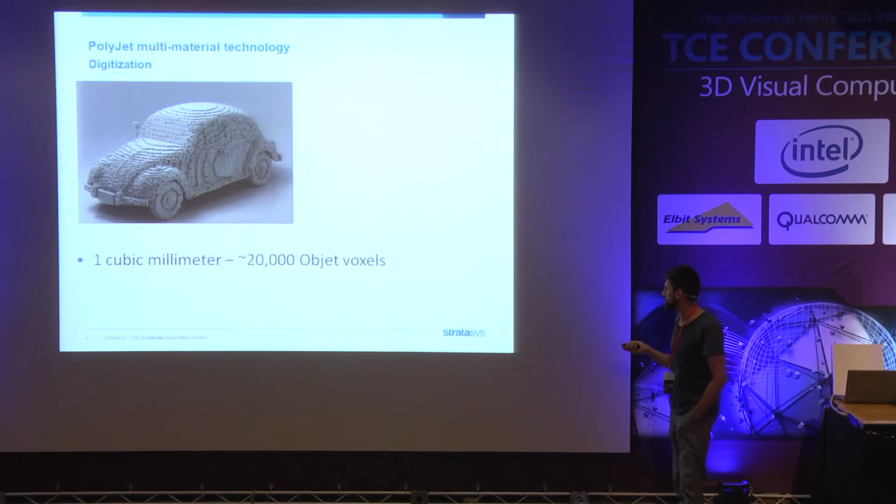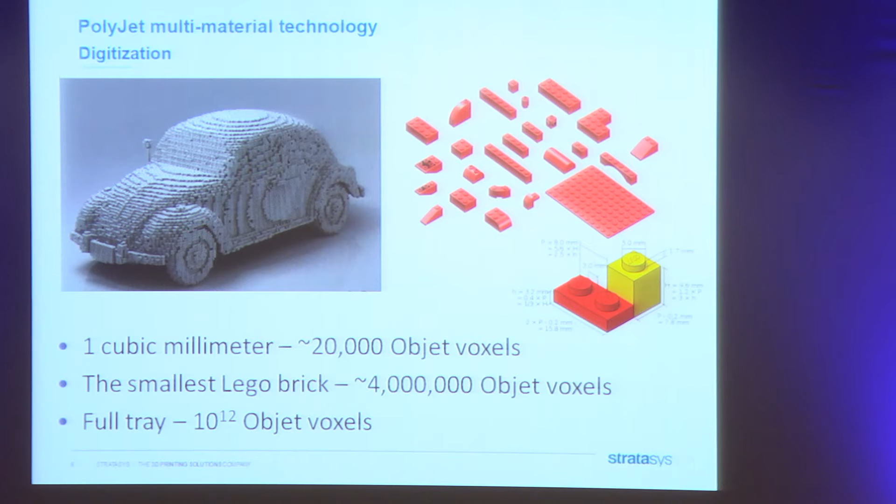And trying to explain the complexity of the digital world we are living in, I must say that 1 cubic millimeter of a printed part will contain about 20,000 Objet voxels, Objet being the old name of our technology. And the smallest Lego brick will be composed of 4 million voxels, while a full tray will have an enormous number of voxels. So we need to manipulate all this data in order to allow our customers to make use of this capability.

And at the end of the day, we say that if 3D printing brought us the freedom of form, then multi-material 3D printing brought us freedom of composition. So we can not only generate any form that we want, but we can also control the composition in any tiny volume of this object.

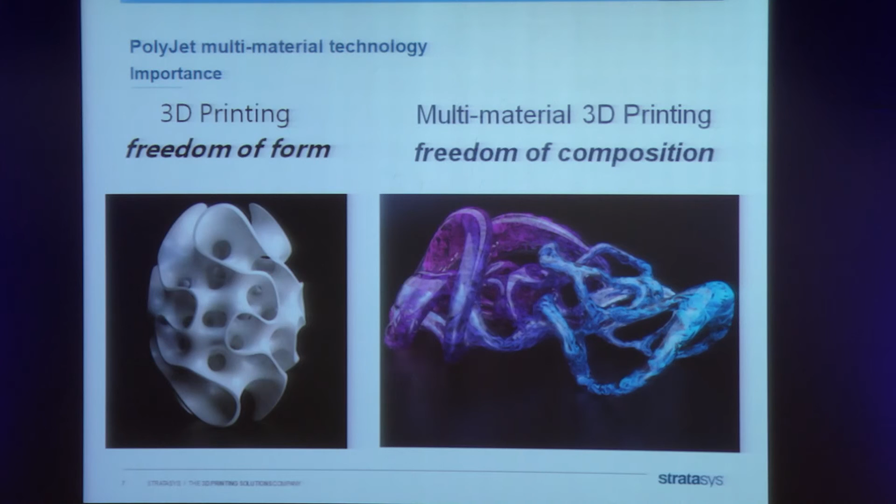And it is now being used for many different products and prototypes. As you know, 3D printing is mainly used today for prototypes. So every object that you hold, be it this pointer or this laptop or your iPhone or the car that you are driving or the plane that you are flying, all of them went through a prototyping phase, and about 90% of the prototypes were made using 3D printers.

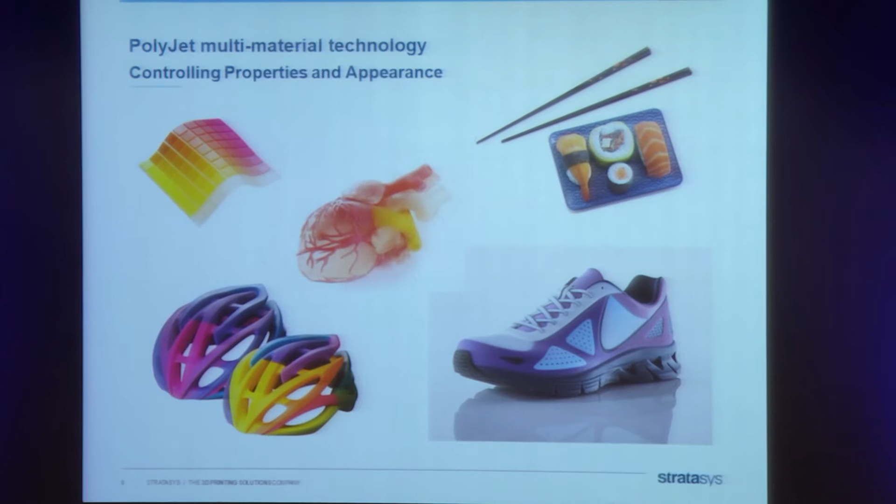And last month, we released our new 3D printer called J750, which is the first full-color printer that's capable of printing full-color parts. You see this one, it's also printed, and also integrating flexible materials into it, transparent materials into it. So you really have huge material possibilities when using this device.

And the way that we combine these different materials together is by creating some microstructures. They can have some ordered phase or some random phases that mix the different materials in various ratios to create the different properties. So if we have a yellow material and the magenta material, we can create obviously the orange and red materials by mixing them in different portions.

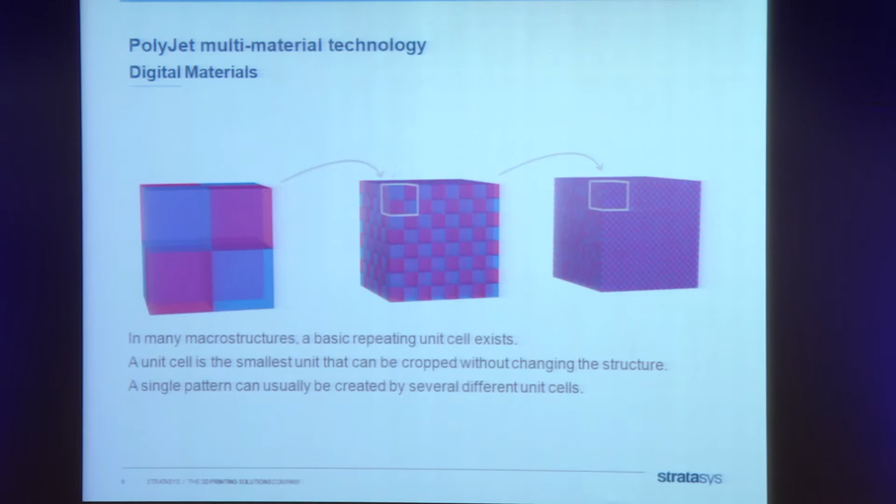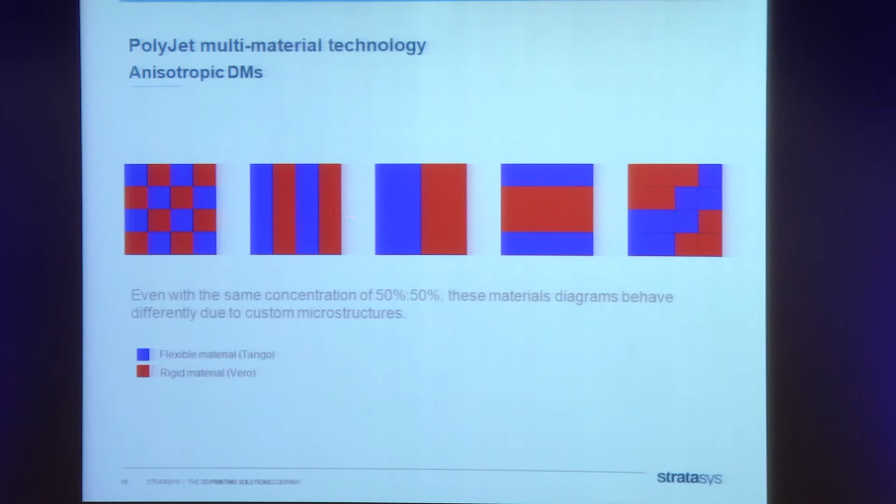But we can also create anisotropic properties, parts that behave differently in different directions, by mixing, for example, a soft material and a stiff material in different shapes. So all these cases have the same amount of soft material and hard material, but the way that they are aligned is different, and it will strongly affect the way that they perform.

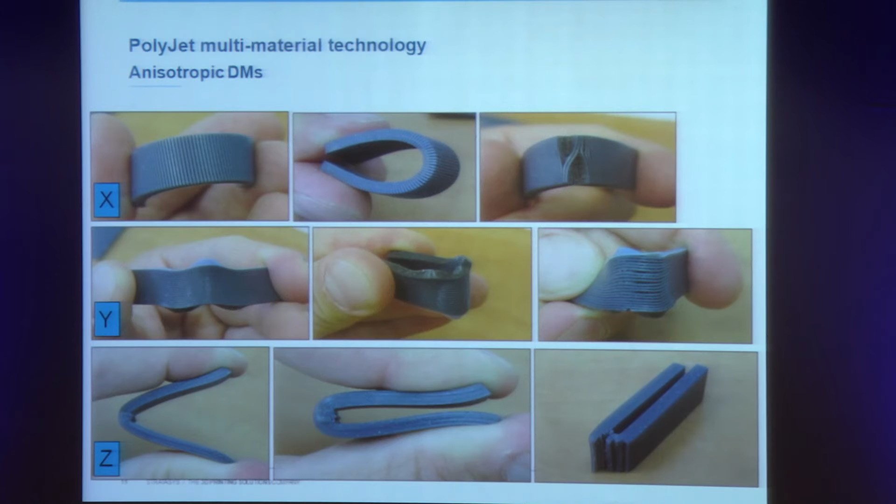So these three samples have some sandwich structure, all have 50% of soft and 50% of stiff, but they're only oriented in different directions, and you see that the mode of failure of these parts is totally different. And here also you see that they break in completely different ways.

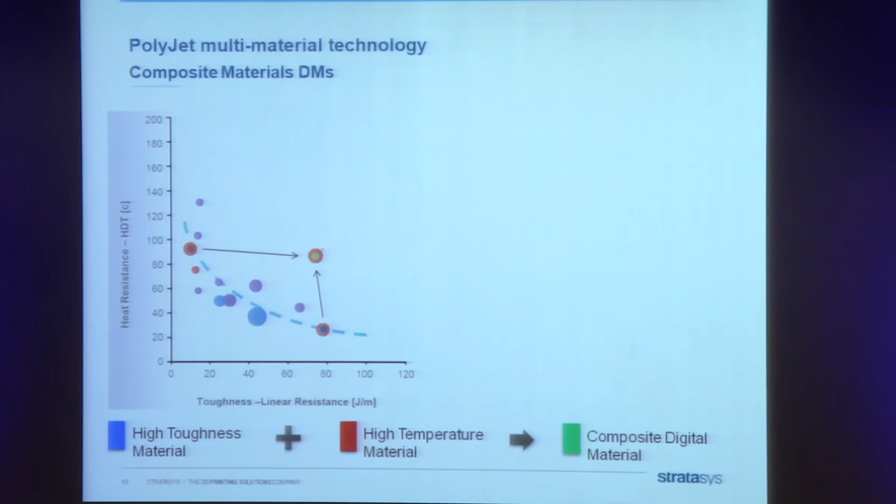And we take it to the limit when we design composite materials that actually mimic the function of conventional composite materials. We take in two components. One is very tough, and the other is very stiff and with very high temperature resistance. Each one of them cannot be used because this one is not stiff enough and this one is not tough enough.

But when they are combined, they have some synergistic effect and result in much better properties than you would expect from a general mixing. And it's achieved by a very sophisticated alignment of the different materials over the printed geometry.

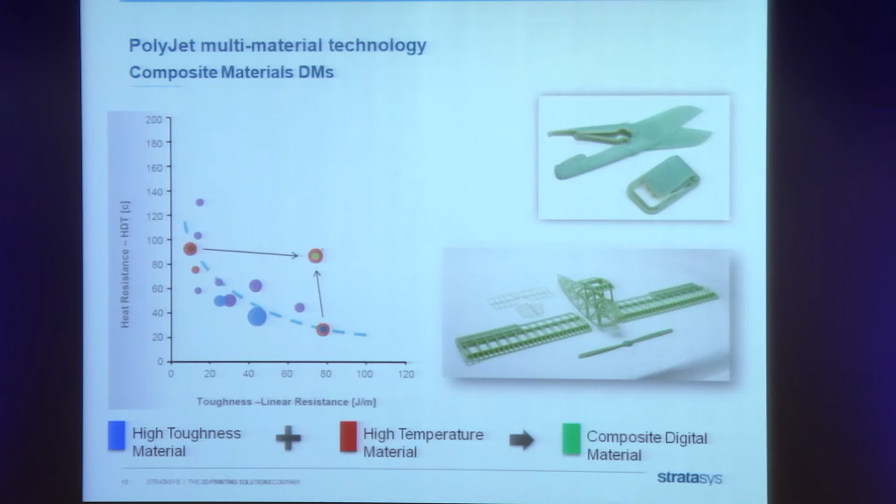So we take all this research and we look at what are the other uses except the prototypes that we can make with this unique hardware that can actually position droplets, tiny droplets of different materials, in any volume that you want.

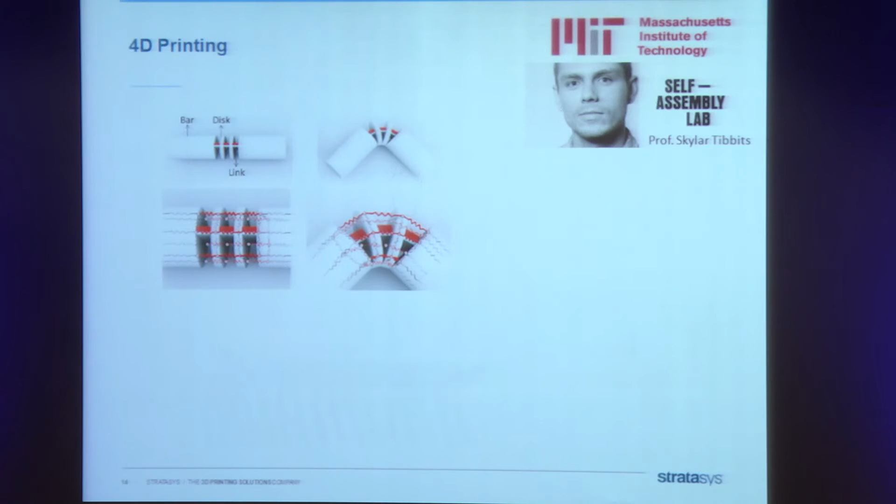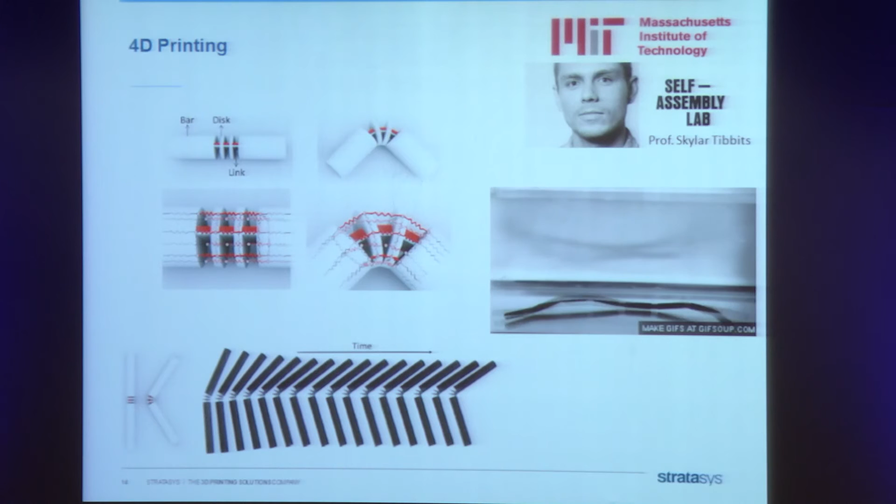So in the 4D printing project, we collaborated with Skylar Tibbits from MIT, and we created a material that swells in water, and it's the red material here, and another material that is just a stiff material that does not swell in water. So when we print the shape and we put it in water, then actually the red material expands and creates some kind of bending. And we can create structures that can be programmed digitally to go from one shape to another shape. And that's a very simple demonstration of just a linear strand going to some cube.

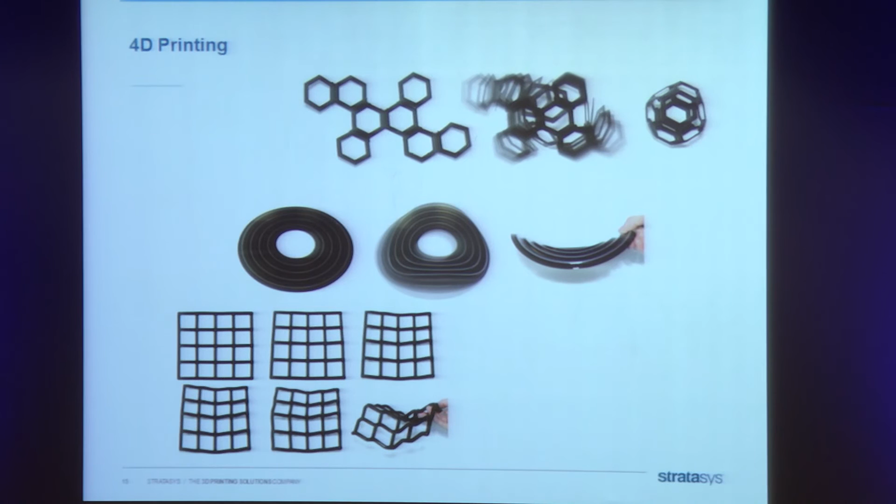And then we made other demonstrations of more sophisticated three-dimensional structures going from one form to another form just by programming how you position the material that swells and the other material that remains static. And all these use a lot of programming and a lot of simulation software to allow the designer to generate these geometries and to program what the transformation will look like.

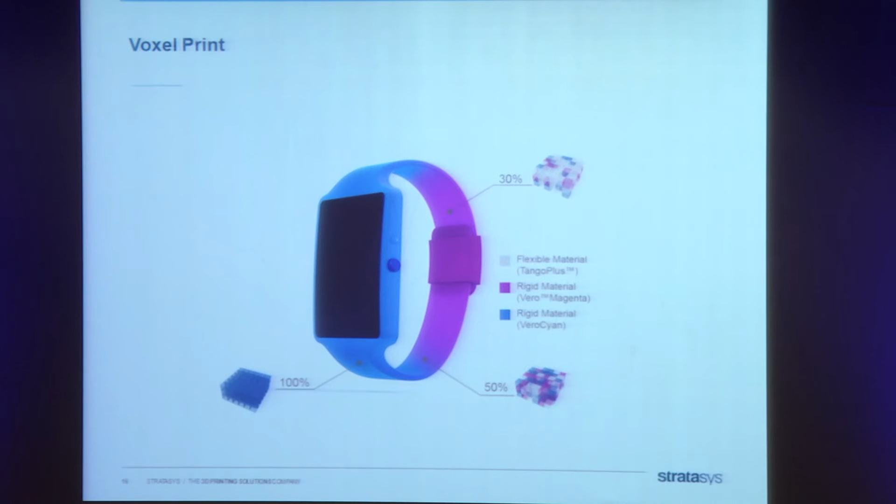And when we go even further and we don't want to just limit ourselves to distinct areas assigned with specific materials and working only with ordered materials, we want also to enable complete free form of gradients of any materials that we want. We developed a module that we called voxel print, where we enable the user, instead of just assigning a specific material to a volume represented by a mesh, to send directly bitmaps that correspond to each droplet that is being printed.

So we can actually program our printer to maximize the capabilities and control every little piece of the geometry that it prints. So you can make gradients in any transition that you like. And that's a kind of experimental interface that we currently provide only to research institutes.

And it requires the users to use some programming language, some MATLAB or C++, or generate their own modules that will output these bitmaps, because today we don't have enough tools that allow volumetric painting and creating some volumetric raster structures. But in recent years, we see more and more works that are developing such tools.

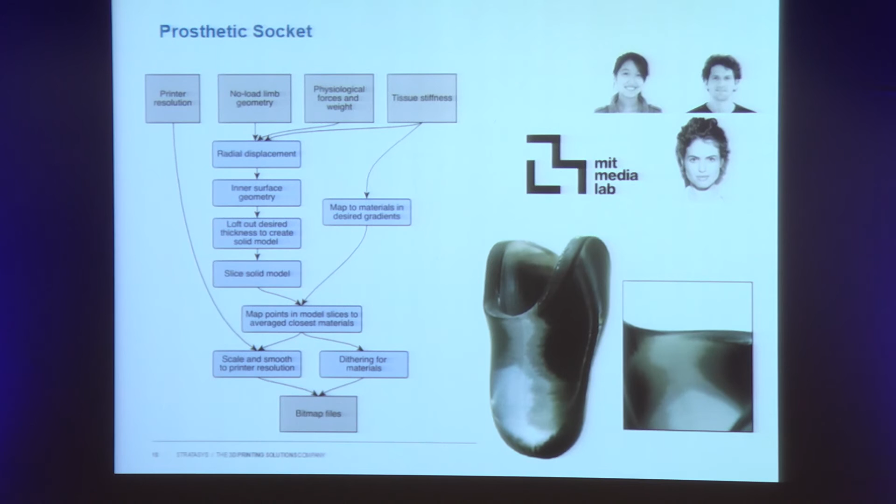And it was printed with our TangoPlus material, which is a rubber-like material, and a stiff material, and actually created a very interesting heterogeneous structure. And you can look, there is an article on this subject.

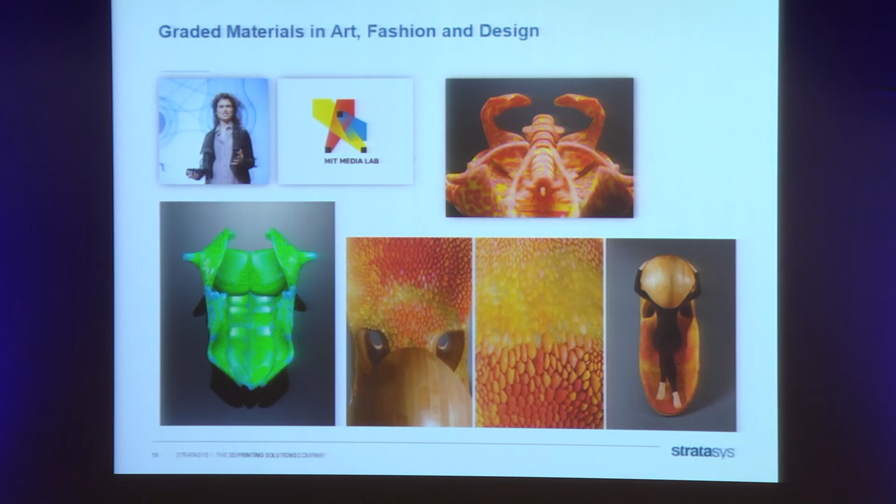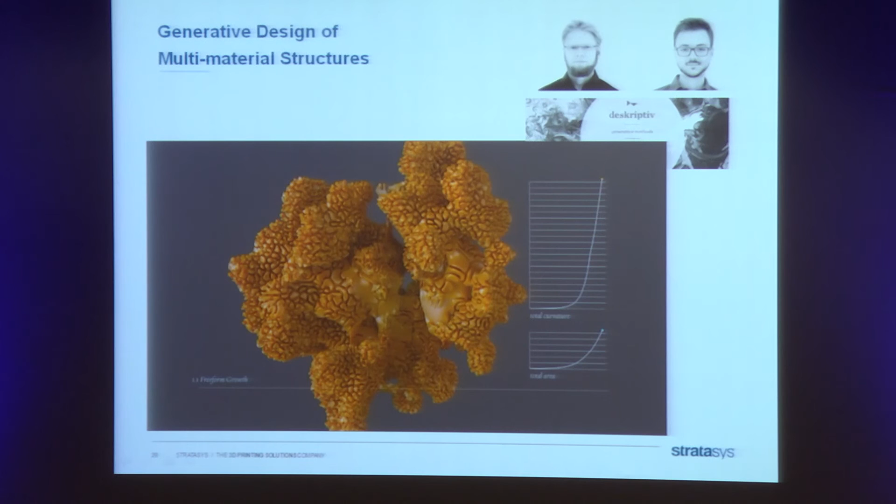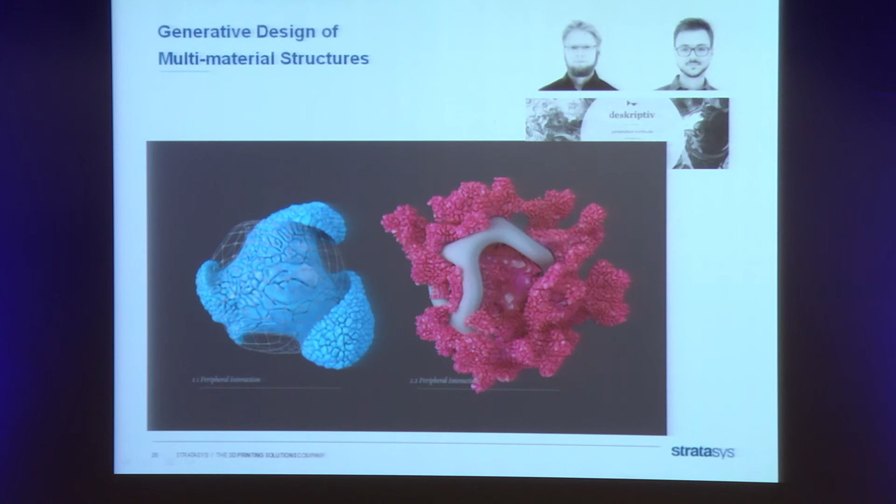But recently, she started working with two guys, Christopher and Dominic, from Deskriptiv, who created algorithms that actually grow structures. They grow structures and they grow multi-material structures. So you guys obviously are familiar with these technologies, how this stuff is made. I'm more on the chemistry side, so I just make use of these tools to combine our different materials and see how we can take it to the limit and create something that was not possible before, and also to see if we can make this multi-material printing more accessible to the regular users.

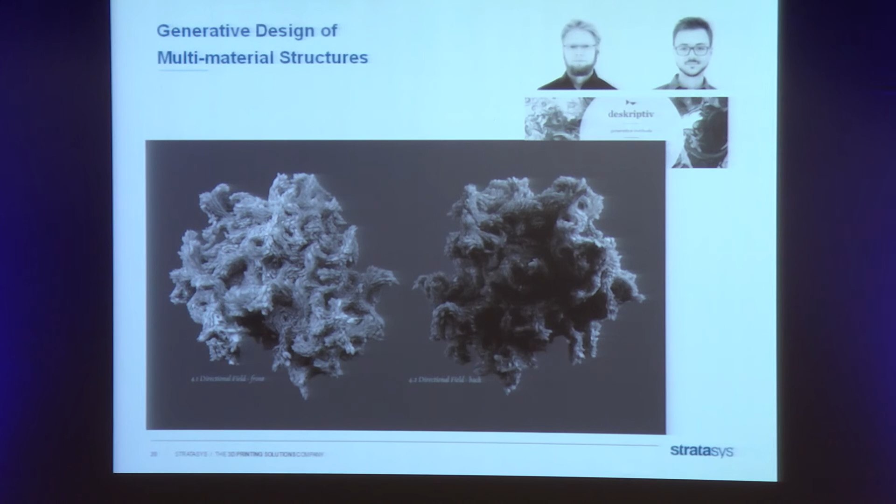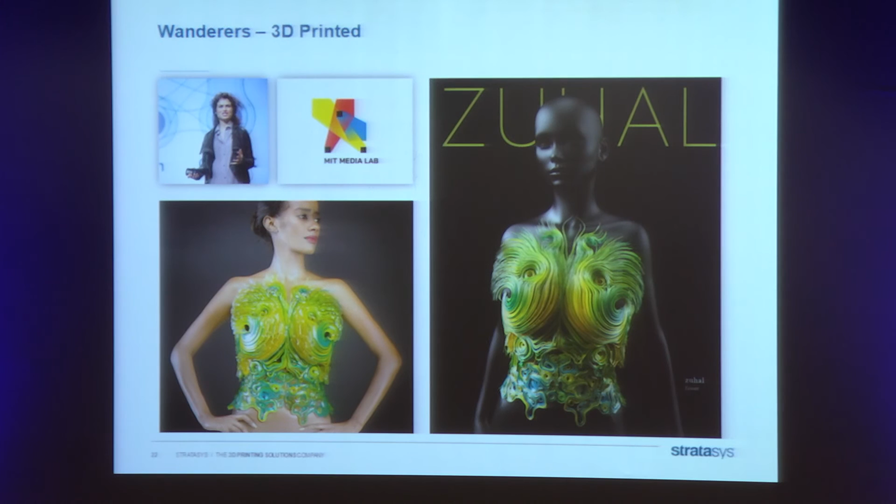And since these algorithms are controlled by parameters, you can think of a simple GUI where you can just change some parameters and create very sophisticated forms. And indeed, these algorithms were used for the Wanderers project, where these forms were generated and then printed on our printers, and we added not only the sophistication of properties and color, but also transparency. So you can see the different material variations that were created in this project, and it was really stunning to see these coming out of the printer. We send it just bitmaps, and we don't know what will come out. And you watch the part, and you are just amazed by the things that we created.

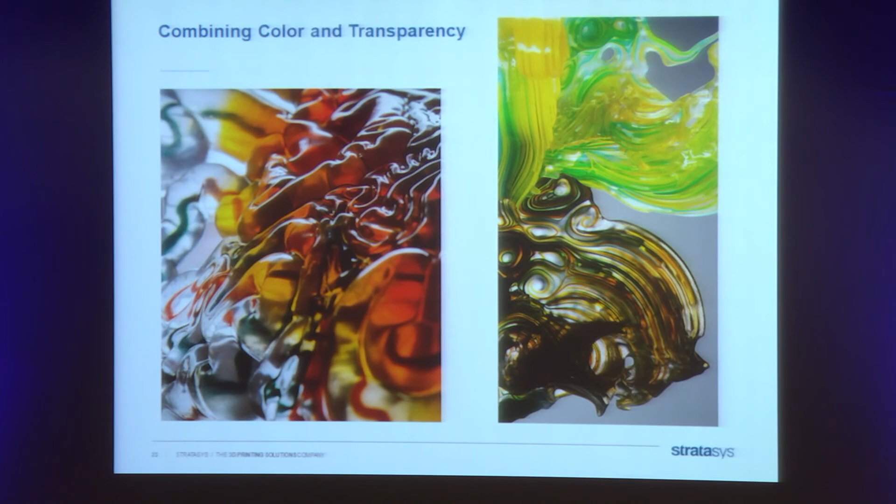And I think that the most interesting thing was printing this part also with internal channels and putting inside some bacteria that makes photosynthesis and glowing in the dark. So it's a kind of combination of biology and 3D printing and algorithmics. And you can read more about it. And there is a nice movie showing this project that I don't have time to go into.

So these projects were doing some imaginary shapes, but we took this and looked at how we can take it down to earth and use it to mimic not imaginary shapes, but our own bodies, which are highly heterogeneous. They are composed of many different tissues with many different properties. And we now have the capability to take some medical scan data and some biological data and convert it into printable data, where we can generate, for example, a printed hand from CT data directly without even going through a mesh, because CT data is a kind of 3D raster data, and it's very similar to the data that we print. We can take the CT data and convert it very easily to printable data.

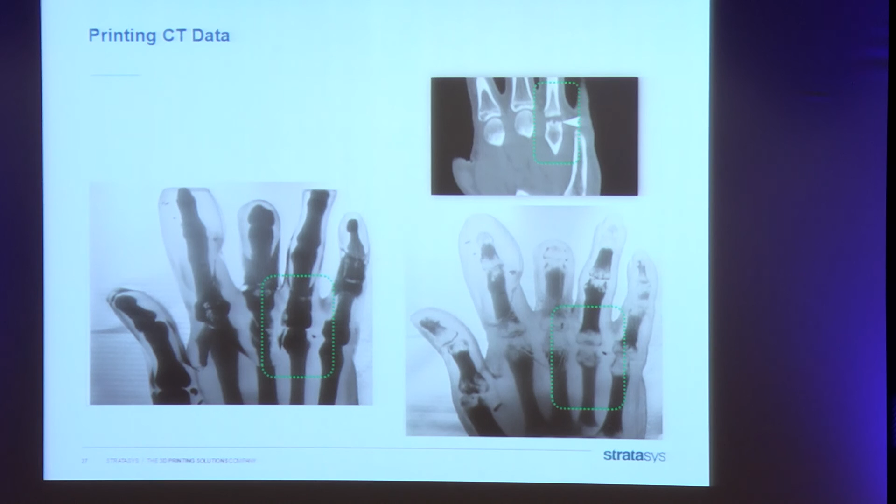And you can see here that if this is CT data, and this is a case where you separated two different shells of bone and flesh, you see that you lose a lot of information in the cartilage, for example. But if you don't go through a mesh and you don't do any threshold, but you convert the CT data directly to printed data, you can actually preserve all the slight variations of the tissue densities that are in our body, and create these highly sophisticated organs.

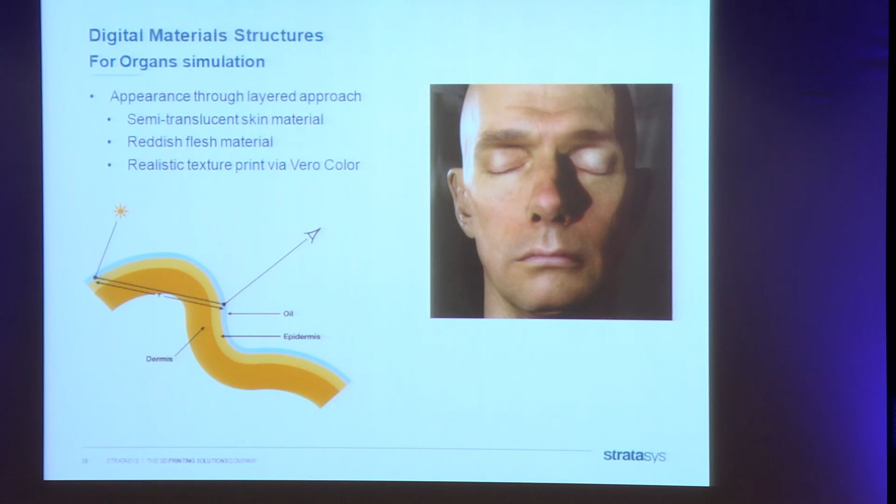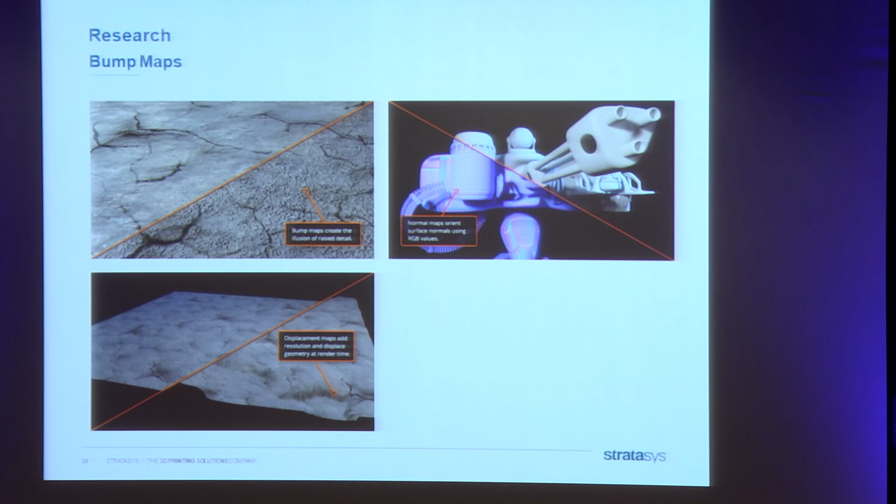And we also learn a lot from the computer graphics world, which already understands how, for example, human skin reflects light, and what are the algorithms that you need to employ to simulate a realistic appearance of human skin. And we take this understanding and we put it into our materials. So we develop materials that actually scatter the light in a way that's very similar to human skin, and we can generate also the flesh that also has properties very similar to the soft tissues of the human body. And we also employ some bump maps. It's all techniques taken from computer graphics into 3D printing, and it results in things like this.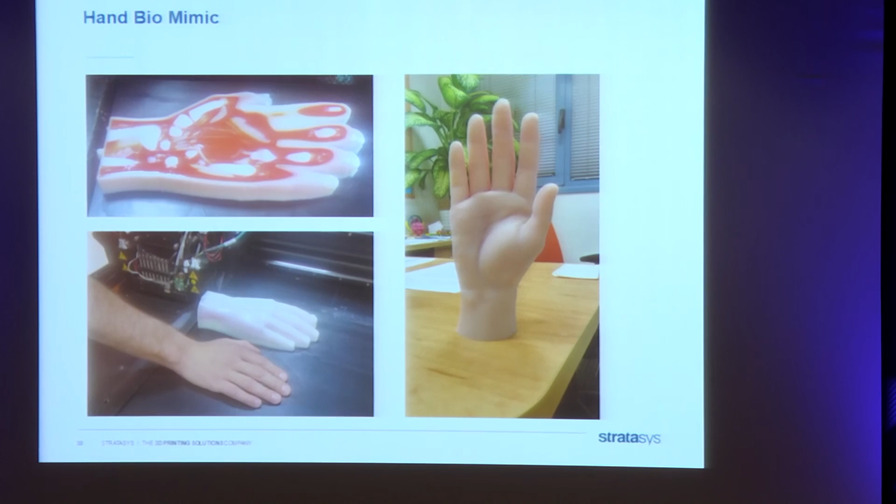For example, this is a printed hand that has an internal structure of all the bones and ligaments, and it has a red flesh, and it's covered by opaque skin material. And it really represents, in a very sophisticated manner, the appearance of real human organs.

Yeah, so I will finish here, and I just say that we're really looking for more and more tools from computer graphics and from algorithmics to make our system run faster, to make more sophisticated objects, to make it more accessible to the people, and to bring multi-material 3D printing to all of us.